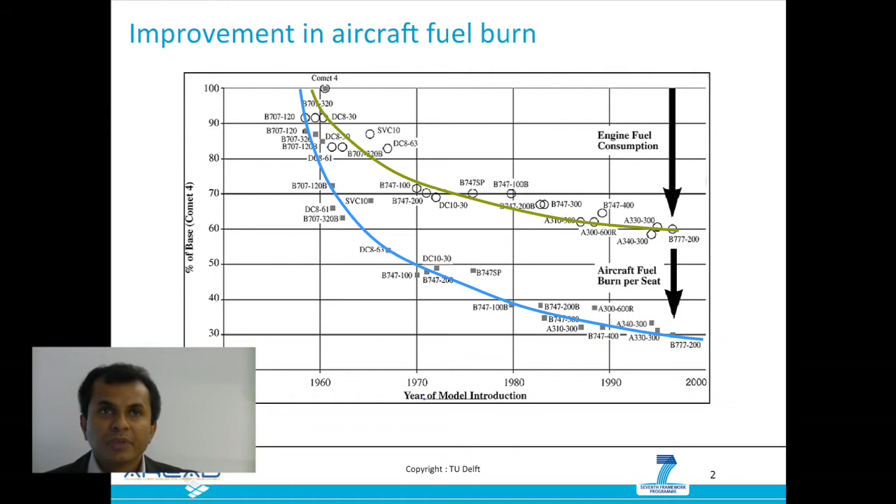Now, if you look at other things which contributed to this fuel efficiency, a significant contributor was the fact that we have managed to put more people in a given space. And that's why earlier flying was a pleasure and today it is not.

Gone are the days when air travel used to be a pleasure, at least in the economy class. That's true.

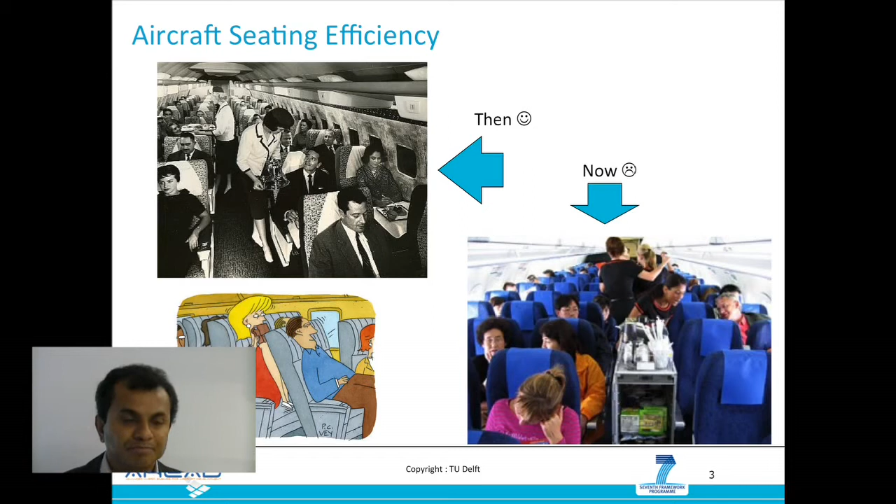There have been moments of hiccups, like after the 9/11 attacks, where the industry was a bit down, but overall growth in the aviation industry has been quite strong and steady. In the past 10 years, passenger numbers have grown by 45%. The freight traffic has increased by more than 80% on a ton-kilometer basis.

Along with these positive developments, some serious challenges for aircraft emissions, community noise, and the availability of fuel resources are encountered by aviation. These are some of the challenges that we need to overcome.

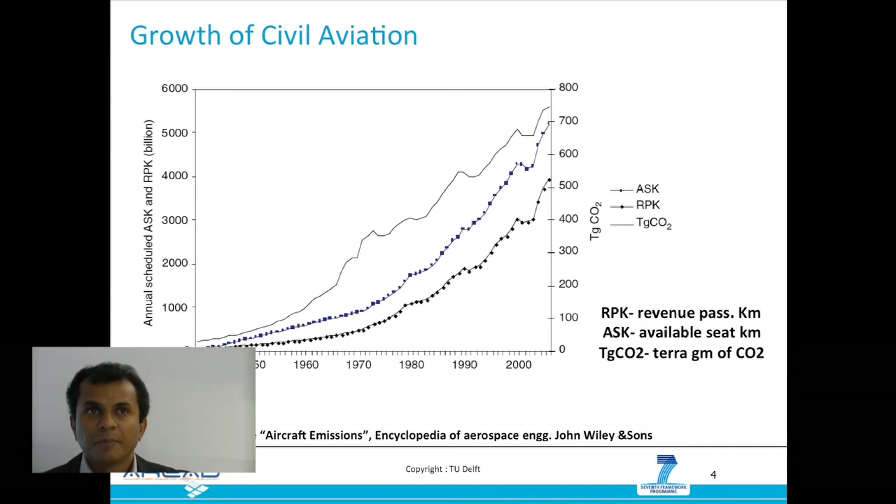Most aircraft have already expanded to their maximum passenger handling capacity. Noise restrictions near the airport are one of the main bottlenecks in increasing airport capacity today. So we have to reduce the noise of our aircraft and engines as far as possible.

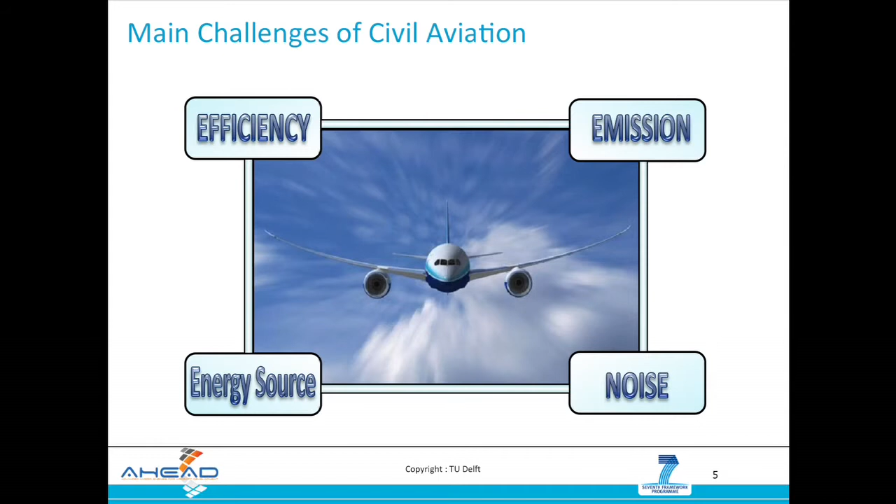Right from the beginning of aviation, aircraft have been using jet fuel as their primary energy source. However, as petroleum resources are getting scarce, we have to look for other resources. And that's why energy source is going to be a major challenge for aviation.

To take this further, many of these challenges explained earlier in the slide were summarized in the ACARE vision document called Flight Path 2050. ACARE stands for Advisory Council for Aviation Research and Innovation in Europe. It's a body which formulates the high-level vision for European aviation.

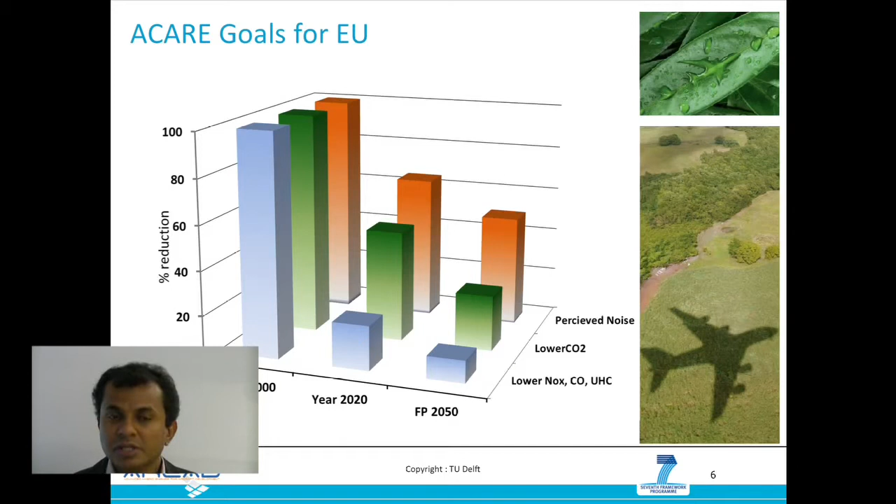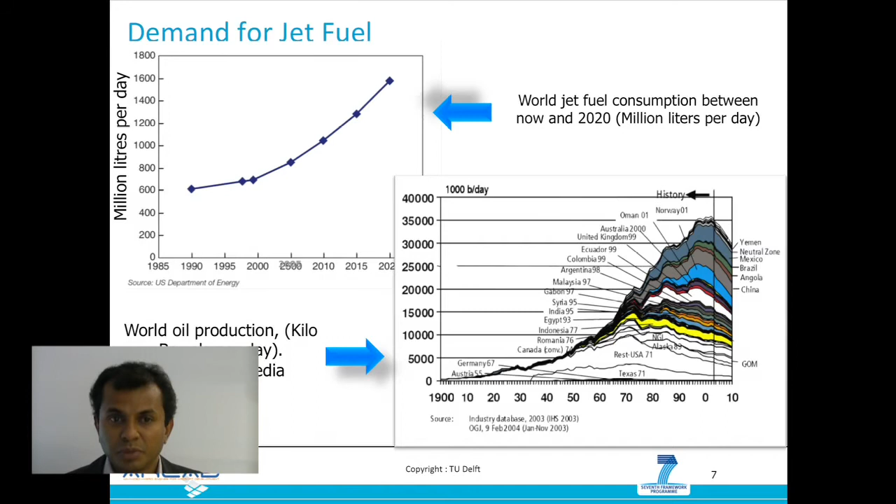So the main question is, how can we continue to fly when there would be no more petroleum available? Now, some people say that we could use biofuels. There is no way that we can produce such a huge quantity of biofuels available all over the world in a sustainable manner without affecting the food chain or the environment in a harmful way.

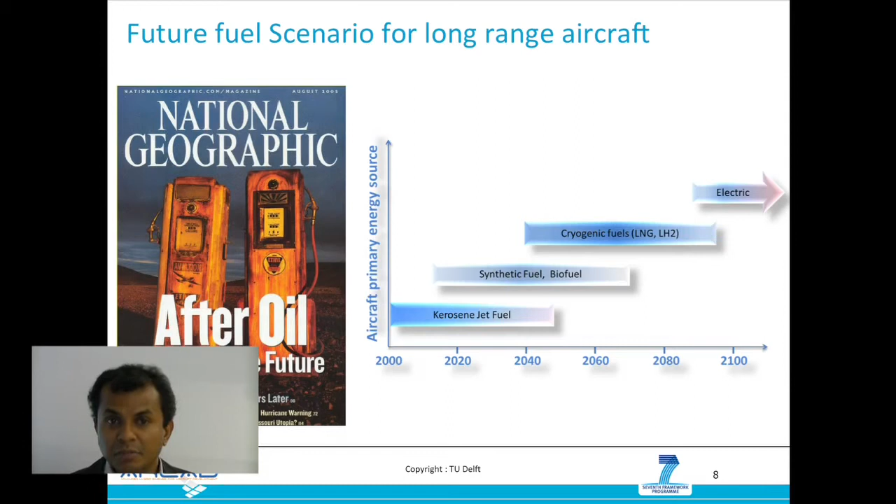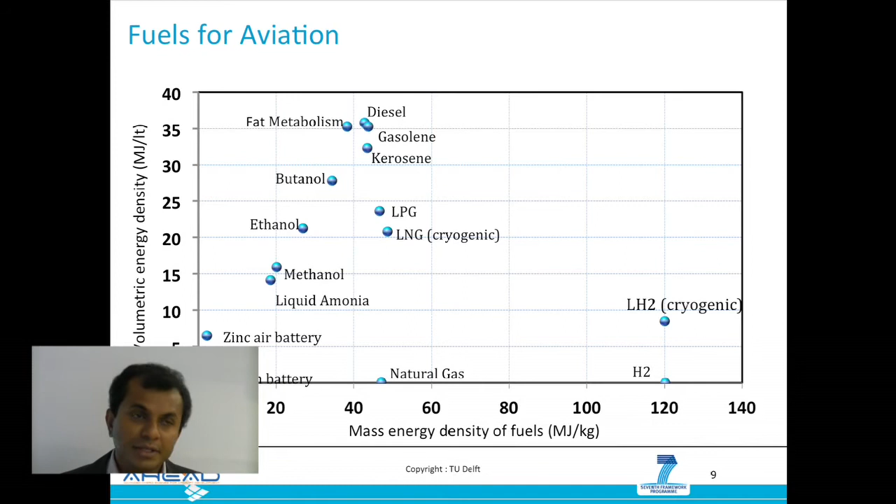Liquid hydrogen, for example, is very good in terms of energy density, but is not good in terms of volumetric energy density. LNG is somewhere in between kerosene and liquid hydrogen. LNG is also one of the cleanest fuels at the moment, and it is also widely available.

Looking separately at the CO2 emissions, again from a well-to-wheel perspective, one sees that gasoline accounts for about 30% more emissions than LNG. Overall CO2 emissions for LNG are the smallest compared to the whole range of fuel types. Also, using LNG as a fuel reduces the resulting NOx and particulate emissions, because LNG is quite a clean fuel. In addition to the fact that LNG is already one of the most environmentally friendly fuels existing, there's a lot of potential across the whole LNG chain for further reducing greenhouse gas emissions.

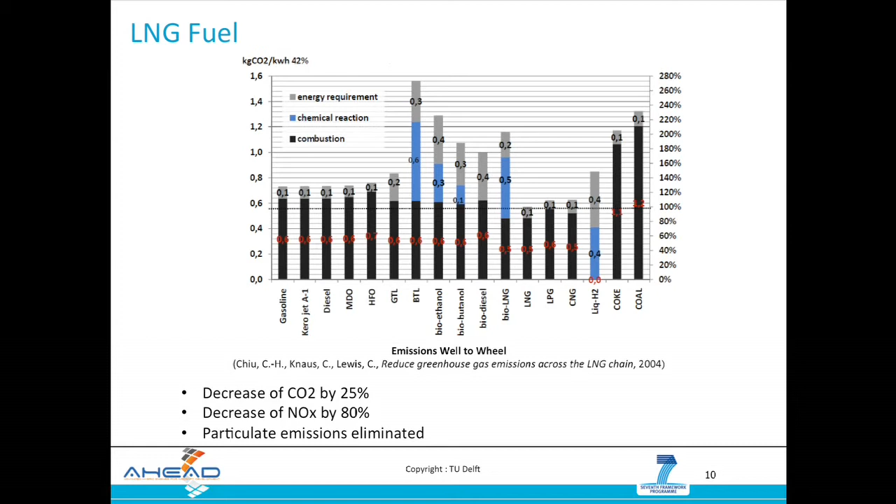However, carrying cryogenic fuel in a conventional aircraft is a problem. Normally, the fuel is stored in the wings of an aircraft. However, cryogenic fuel should be stored in well-insulated cylindrical tanks, and these tanks cannot be stored in the wings—they have to be stored within the fuselage.

As shown in this figure, you can see that the cylindrical tanks were stored within the fuselage. This is from the cryoplane project that was sponsored by the European Commission. However, storing tanks within the fuselage increases the fuselage volume substantially, increasing fuselage drag, which in turn increases the required thrust and hence the fuel consumption. You can see that conventional aircraft configuration is not suited for storing cryogenic fuels.

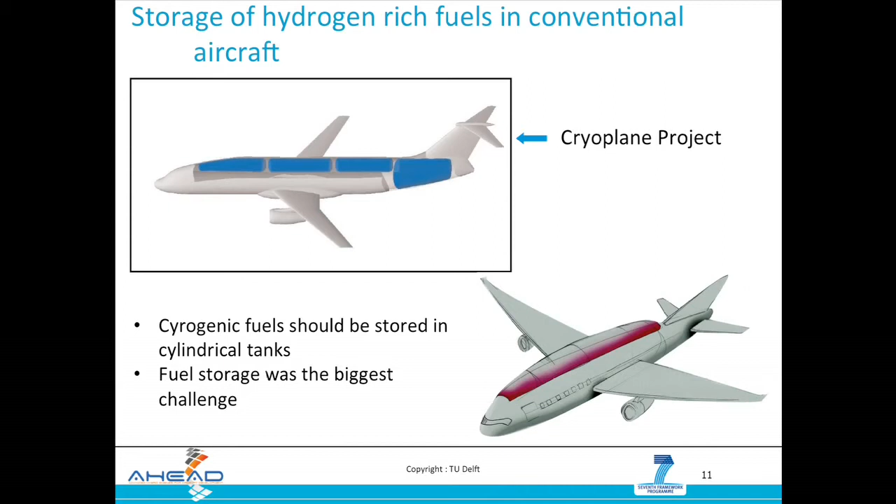Now, we came with a novel solution for storing cryogenic fuels. We are using a blended wing body aircraft. The extra volume within the blended wing body aircraft can be used to store cryogenic fuel tanks without incurring much drag penalty.

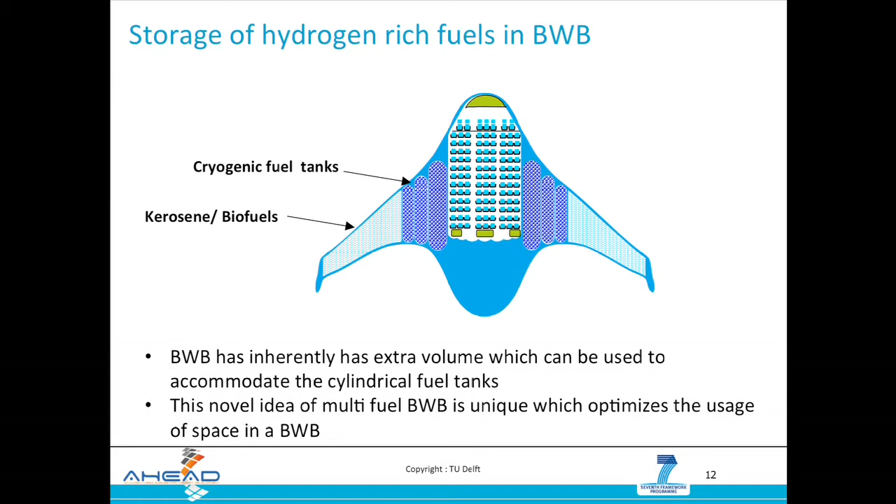We also optimized the space utilization by storing some biofuels within the wings, as can be seen here. Now, this unique multi-fuel blended wing body aircraft configuration makes carrying cryogenic fuel on board the aircraft much easier and also safer. This unique novel configuration has the potential to change aviation like anything. This could be the most significant step change in aviation after the introduction of the Boeing 747.

Based on this novel idea of a multi-fuel blended wing body, the AHEAD project and its consortium was formed, with the aim of investigating the feasibility of this novel aircraft, the multi-fuel blended wing body, and to design an engine for this unique aircraft. AHEAD stands for Advanced Hybrid Engine for Aircraft Development.

The consortium consists of Delft University of Technology, with me as the technical coordinator, WSK Rzeszów, an aero engine manufacturer from Poland, who is the main industrial partner in the project, the Technical University of Berlin, which is primarily investigating the hydrogen combustion chamber, as I'll explain later on, DLR Institute of Atmospheric Physics in Oberpfaffenhofen, looking at the effect of cryogenic fuel on atmosphere and climate change. Technion from Israel is looking into flameless combustion chamber, and Ad Cuenta is taking care of project dissemination. The project started in October 2011.

Because this uses two different kinds of fuel, it has to have two different kinds of combustion chambers. The first combustion chamber, which is located between the high pressure compressor and the high pressure turbine, is the combustion chamber that uses hydrogen. This is the typical one used in a conventional gas turbine as well.

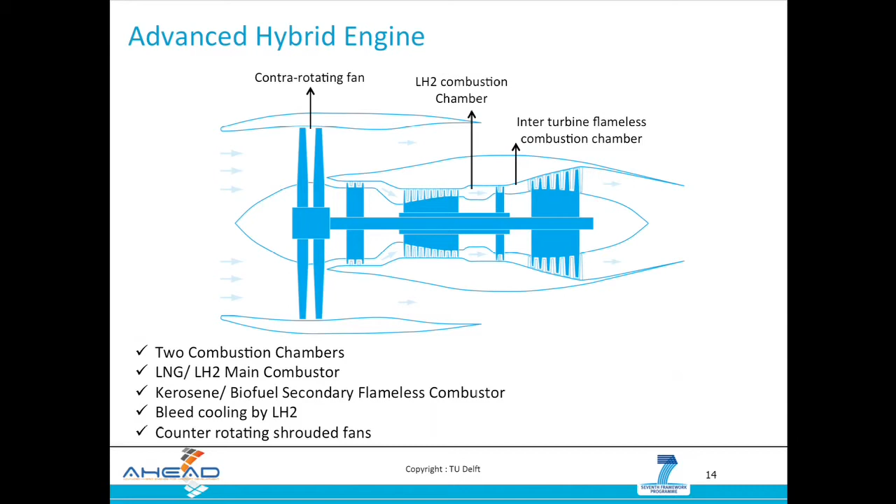The AHEAD project is divided into 3 work packages, and this chart gives you an overview of various technologies that are being investigated in the project. What we can see is, right from the beginning, the whole entire engine is being designed with environmental considerations, and the final work package is basically defined in such a way that the environmental assessment and integration can take place in a synergistic manner.

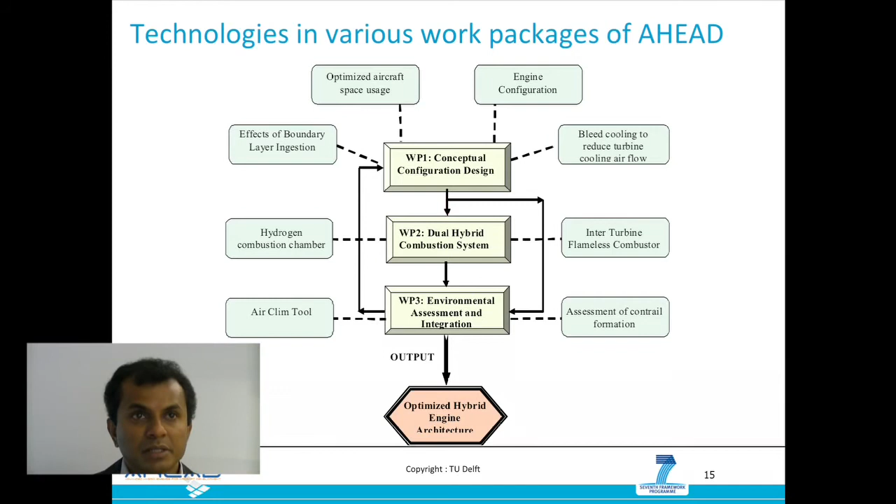It's a multi-fuel aircraft, meaning it carries two types of energy sources: one cryogenic and one liquid fuel. The cryogenic fuel could be either LNG or liquid hydrogen, and the liquid fuel could be kerosene or biofuel.

Of course, the main goal of the aircraft was to meet the cargo goals. It is designed to carry 300 passengers with a range of around 14,000 kilometers. So it's a long-range aircraft, because this is a market that we see is going to grow quite a lot—point-to-point connection, so you can fly directly from Amsterdam to Shanghai, Beijing, Tokyo, Osaka, and other places. It should be available by 2050.

Now the aircraft is designed, as I said, for two different kinds of fuels. Right from the beginning, it is being designed with the aim of reducing emissions and pollutants. Conventionally, an aircraft is designed with the objective of reducing fuel consumption, and later the impact on the environment is evaluated. This is the first aircraft in which environmental considerations are taken into account right from the beginning in the design.

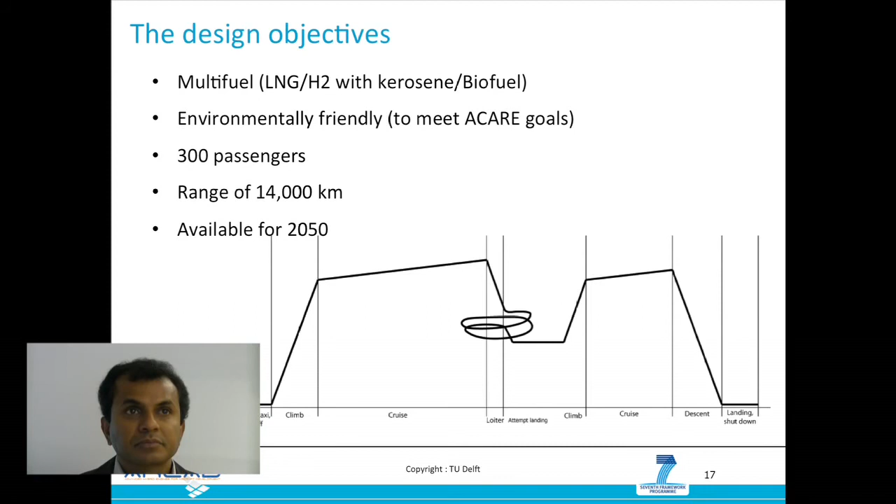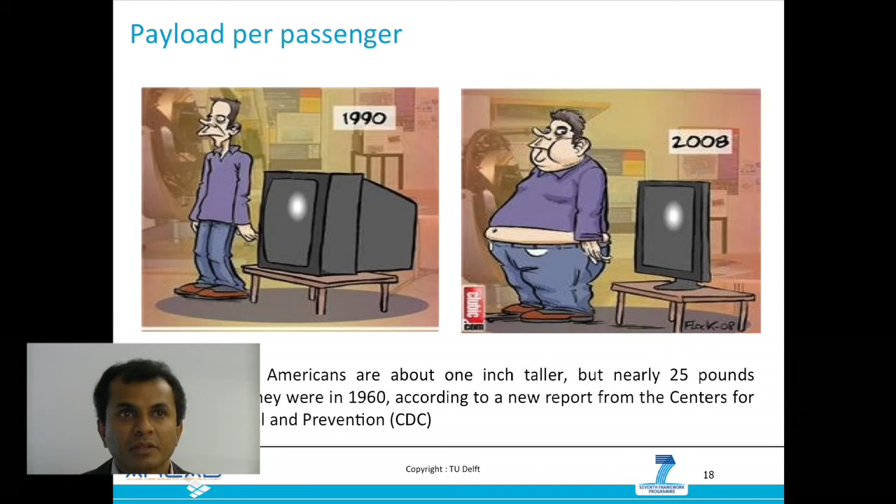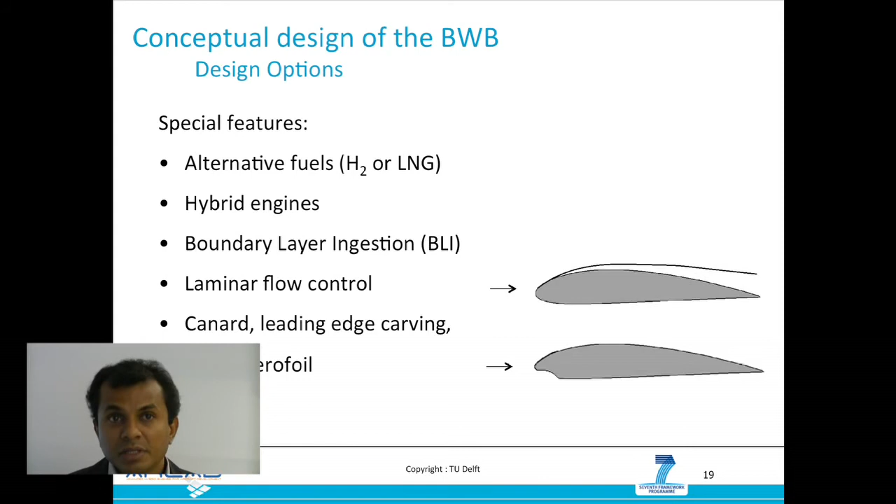The noise can be reduced significantly, and also the fuel consumption can be reduced a bit. By the year 2050, active flow control technologies will be available, which could be used to increase the laminarity of the wings. We are also using a canard for the aircraft, because blended wing bodies normally have a nose-down tendency.

We have looked into several configurations, like how we can place the passengers, and how we can segregate the space between the passengers and the space for carrying cryogenic fuels. We have looked at different fuels, as I said, LNG as well as liquid hydrogen.

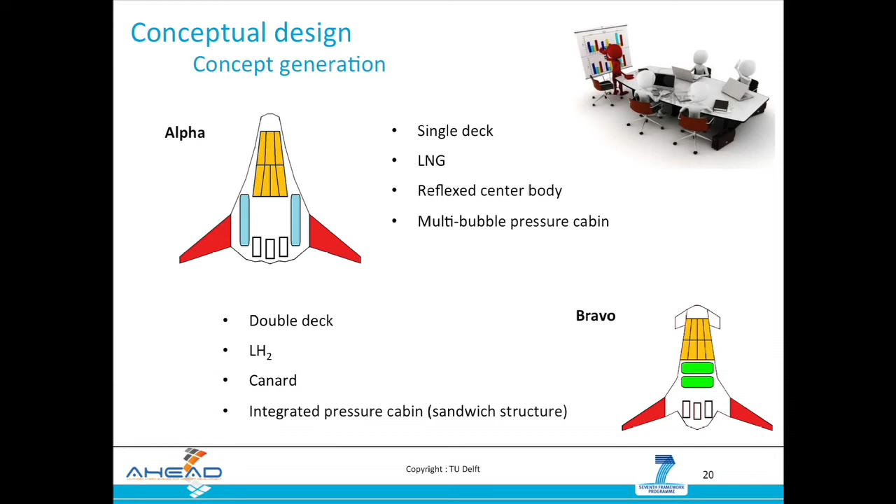This is a concept, Bravo, which had a different configuration of aircraft. One of the main considerations looked at was the evacuation rule of 90 seconds. A lot of trade-off was done.

This is one more configuration that we looked into. Again, every configuration has slightly different features, slightly different configuration in terms of how we separate the passenger section, how we store fuels, and what kind of fuels we use.

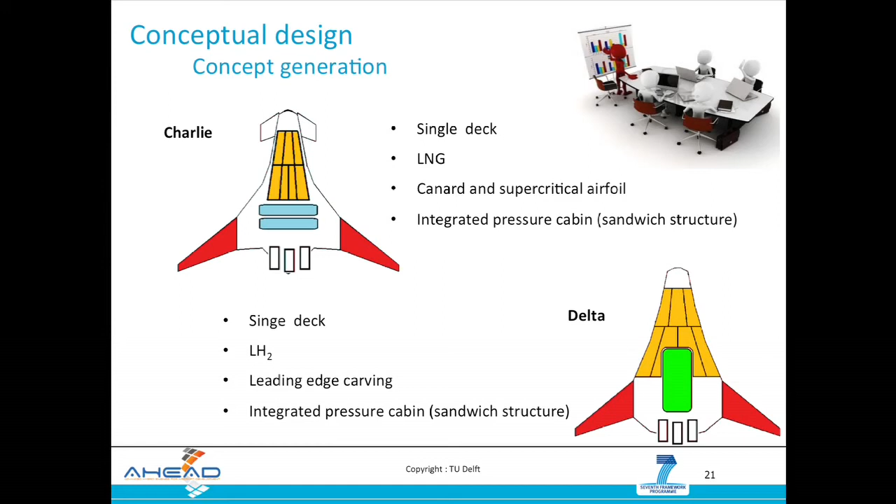Of course, what we chose was Charlie, the third concept you see on the slide. Preliminary design procedures were used: we went from conceptual platform to planform sizing and arrangement, then estimated weight and CG. After that, we looked at stability and control, aerodynamics, structures, and performance analysis, and this loop was carried on over and over till we could converge to a reasonable design.

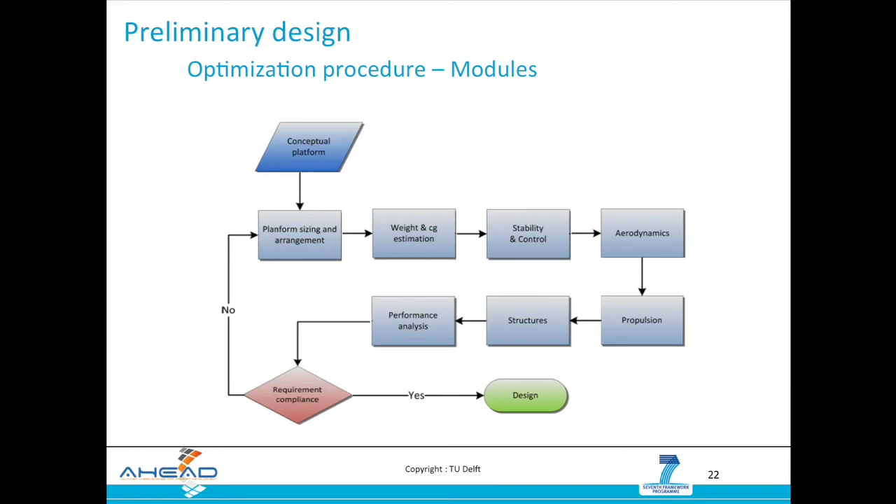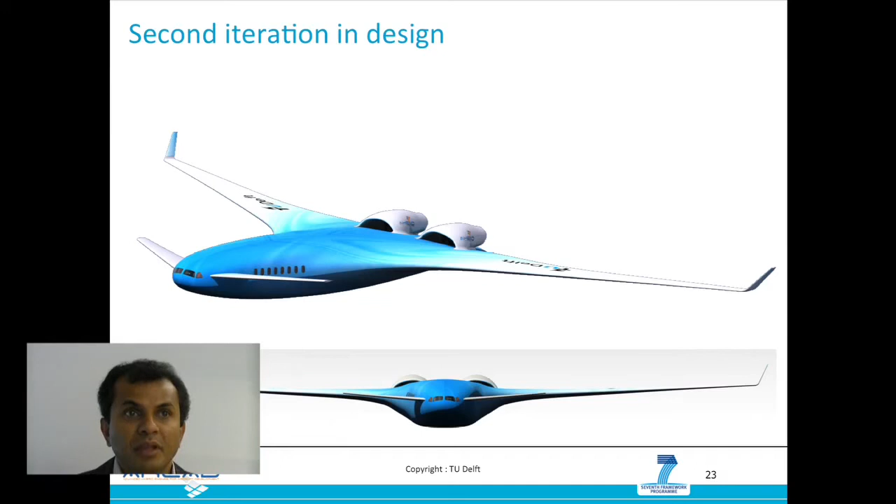Designing a low NOx hydrogen combustion chamber is a huge challenge for designers. Within the AHEAD project, the Technical University of Berlin managed to design a burner which can be used as a basis for designing a hydrogen combustion chamber.

This burner uses a combination of swirl and axial injection to allow for pre-mixing of the fuel without facing the danger of flashback. What do I mean by flashback? It's a phenomenon that happens when the hydrogen flame starts creeping up towards the fuel injector, because hydrogen is so reactive. This can be catastrophic, and it can burn down the whole combustion system within a few seconds.

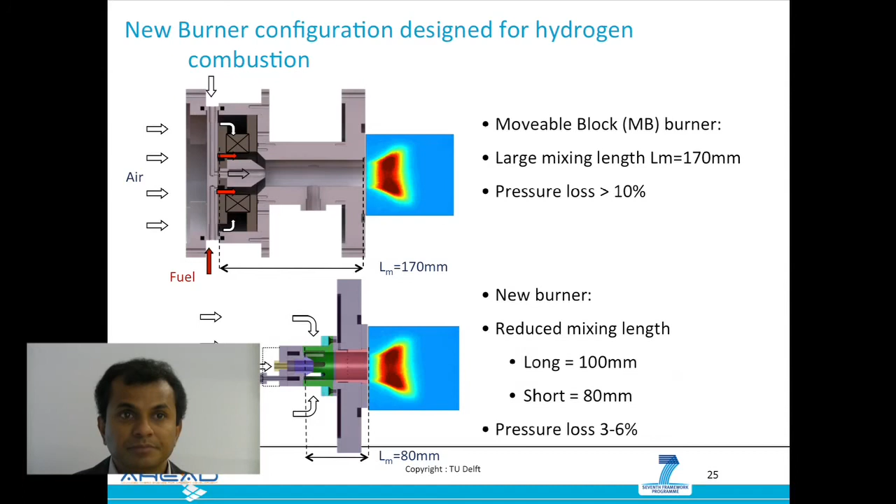The pressure losses within this new combustor design are also within acceptable limits. This new burner was tested in the combustion test rig of Technical University of Berlin. Diagnostic instruments were used to characterize the burner and the combustion zone. The new burner design was tested at atmospheric pressure. This is the schematic of the burner.

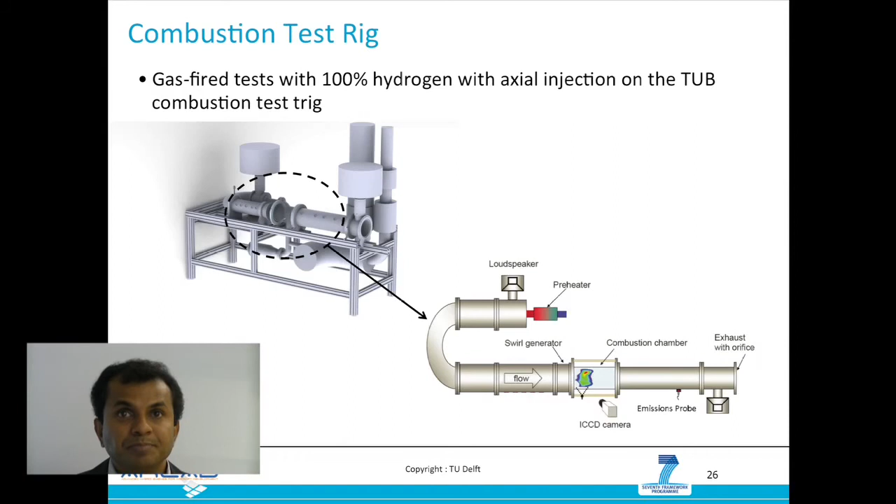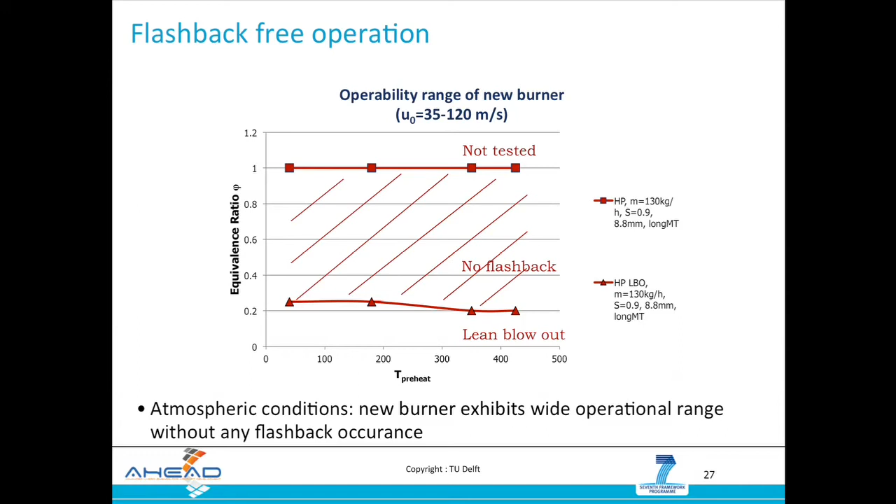The burner was tested at various inlet temperatures and equivalence ratios, that is, various air to fuel ratios. Within this range of equivalence ratio that is likely to be encountered in engine operation, the burner exhibited very stable operation without any flashback over a long period of time. So that has been one of the major achievements of the AHEAD project.

As I've explained earlier, we use two different kinds of fuels, and that's why we require two different kinds of combustion chambers. The second combustion chamber, which uses biofuel, is actually situated between the high pressure turbine and the low pressure turbine, and it uses a very unique combustion technology that we call flameless combustion.

What is flameless combustion? It's a kind of combustion that takes place at high temperatures and low oxygen concentrations. The unique feature of this technology is that the NOx emissions from this combustion are very, very low. We want to use this technology in the second combustion chamber so that the NOx emissions from the AHEAD engine are very low.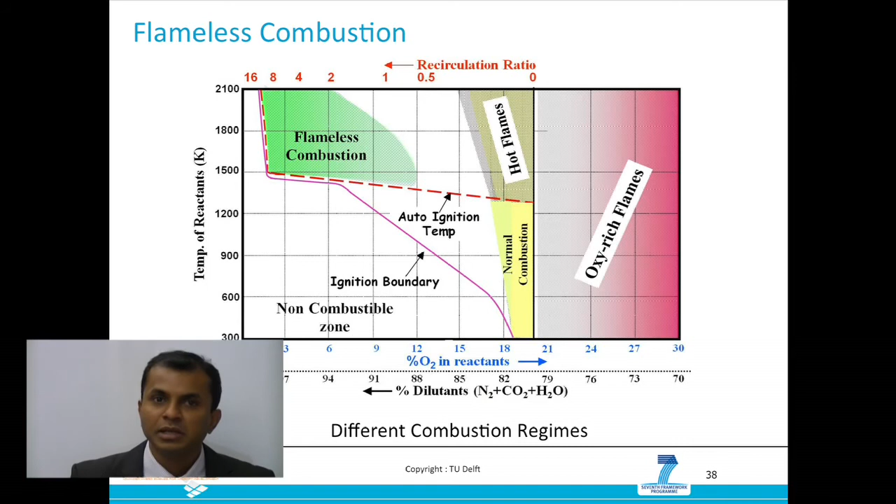The combustion chamber is a very unique design. The prototype will be tested at atmospheric conditions in IST Portugal. The Technion from Israel is spearheading our efforts in designing this flameless combustion chamber, and we are trying various configurations. We are eagerly waiting for the results from this test, because this will be really a revolution in terms of combustion chamber design as far as gas turbines are concerned.

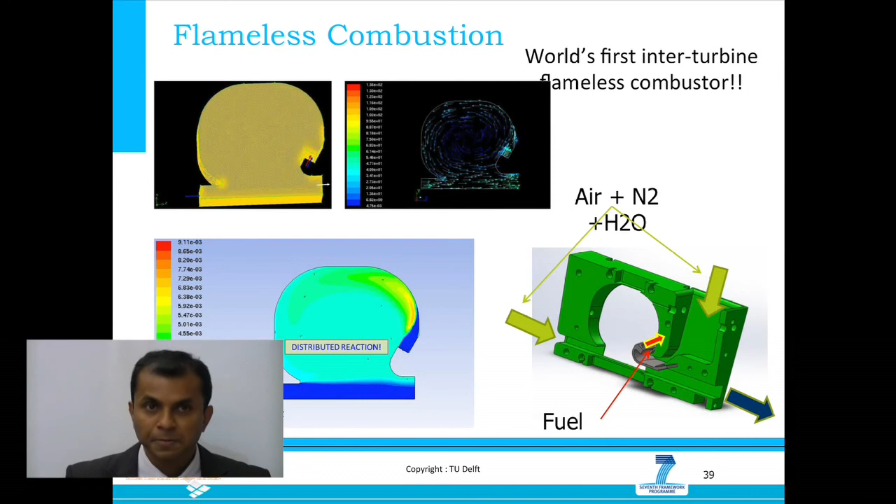Our partner WSK, the industrial partner, is involved in designing a cryogenic heat exchanger for cooling the bleed air. Why do we cool the bleed air? Because this technique of cooling the bleed air enhances the efficiency of the engine.

It also has another advantage: the fuel going into the combustion chamber becomes heated, and when it gets heated, the amount of fuel required in the combustion chamber also reduces. So we have two advantages of using a heat exchanger to cool the bleed air, using the onboard fuel in a synergistic manner to increase efficiency.

We have performed the sizing of various components in this heat exchanger, and the design has some unique features, which is why it's under patent at the moment.

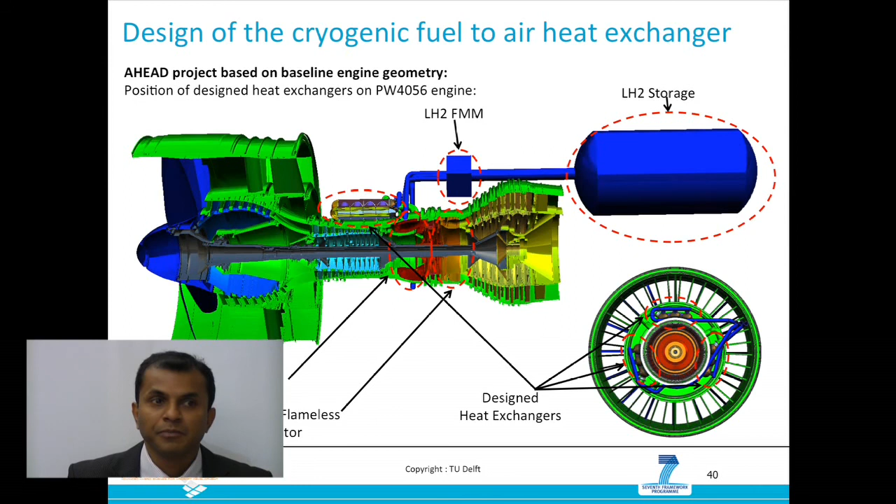In terms of engine performance, when compared to the baseline engine, the GE90, which is used in the Boeing 777 aircraft, and that is the baseline aircraft for our whole design, we see that the hybrid engines can reduce the energy consumption and CO2 emission per unit thrust produced while increasing the specific thrust.

However, this reduction is only from the engines. When we combine this reduction with the aircraft as well, because we also use a blended wing body aircraft, which is aerodynamically much more efficient, then the results can be seen in the next slide.

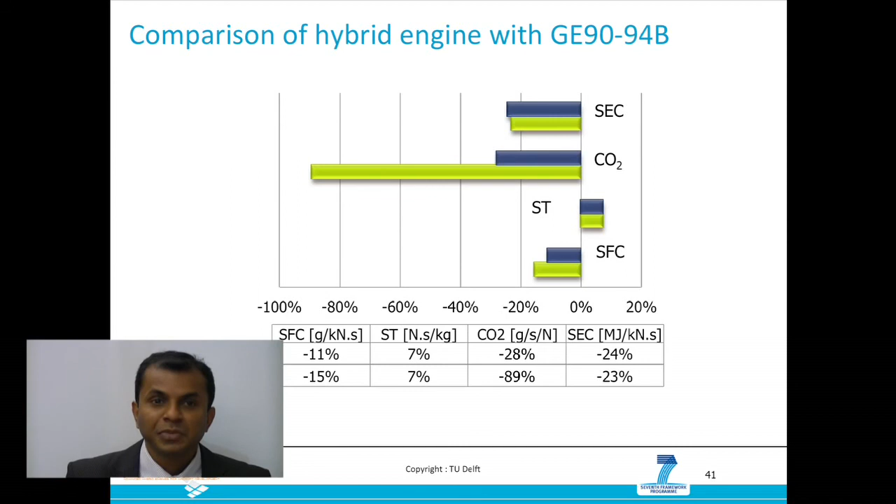And what do we get? When we compare our aircraft with the baseline aircraft, that is the Boeing 777-200ER, we see that the CO2 emission is reduced by around 65% when we use LNG and biofuel as our energy sources. This reduction is based on a per unit payload, per unit kilometer basis.

The reduction in CO2 can be increased further by using liquid hydrogen and biofuels. However, since the life cycle carbon footprint of hydrogen is not well known at this moment, the exact numbers cannot be predicted. The particulate emission is also significantly reduced due to the cryogenic fuel and flameless combustion especially. And since the blended wing body has more volume per passenger, we believe that it would give a more comfortable travel for people.

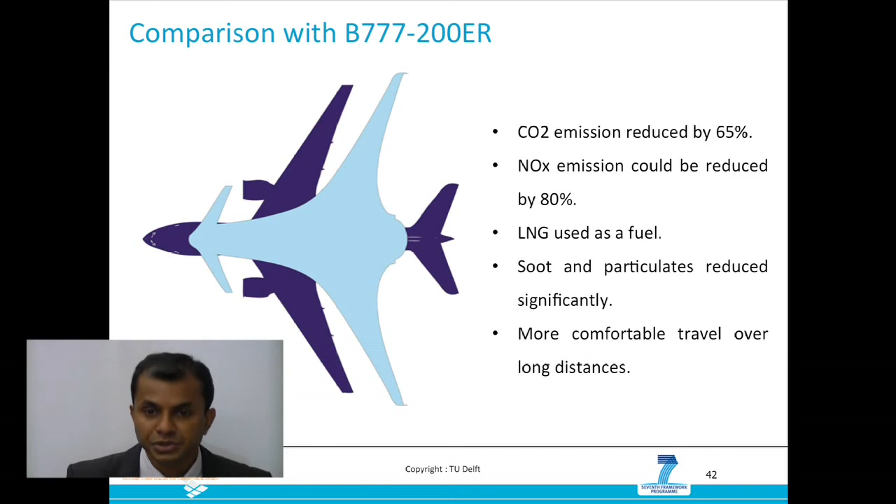Now, the multi-fuel blended wing body with hybrid engines reduces the emission of CO2 significantly. However, there is a penalty, and that is the increase in water vapor content because we use cryogenic fuels. Even though water vapor is less harmful in terms of global warming at lower altitudes, at flight altitudes the effect can be significant.

Now, what we are doing with DLR is looking into the effect of this increased water vapor content on global warming.

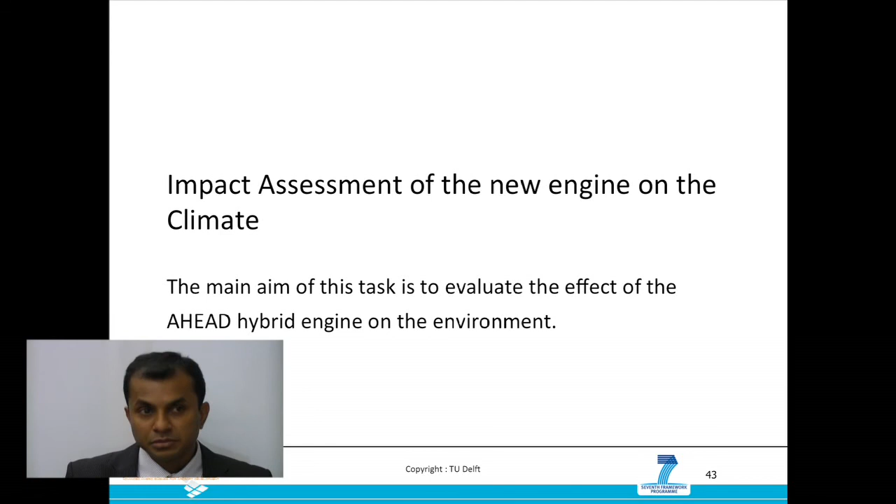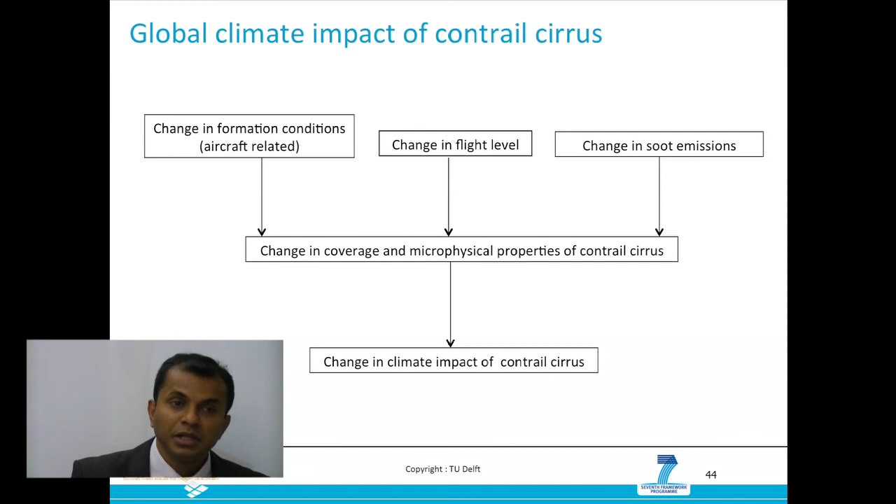This is a very complex phenomenon, and there is a serious lack of understanding of how this occurs in general. Our partner from DLR, the Institute of Atmospheric Physics in Oberpfaffenhofen, is tackling this problem. They are looking into the effect of increased water vapor content, the reduction in soot emission, etc., on contrail formation, and how this contrail formation affects the greenhouse gases, or the greenhouse effect in general.

Preliminary studies show that if we fly higher, the increased water vapor content will increase the greenhouse effect. However, we are working on optimizing the flight mission with respect to greenhouse emissions. At the moment we don't know the optimized mission, but in due course of time we will come to know that.

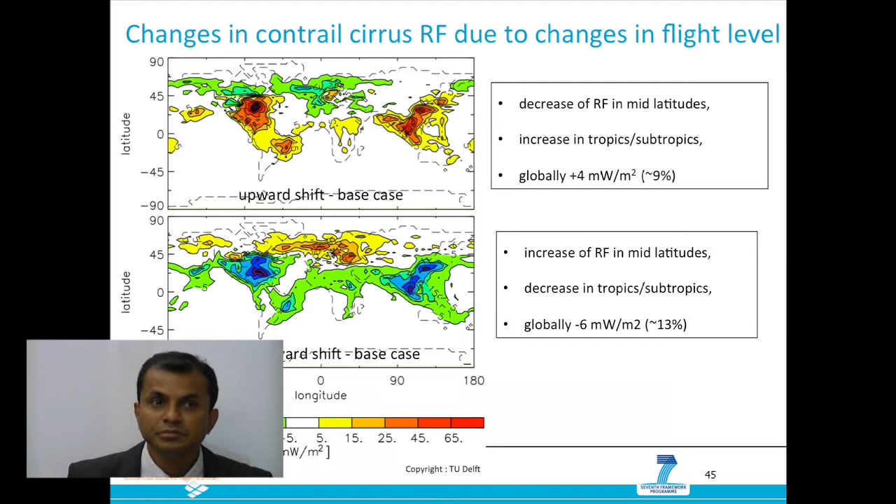I showed in the earlier slide what the main challenges of civil aviation are. And I'm proud to say that the AHEAD project tackles most of these challenges.

Just to summarize the main achievements of AHEAD: we gave a new configuration to the aircraft, the multi-fuel blended wing body aircraft, which has major advantages as compared to the conventional tube and wing aircraft, especially for long range. The novel way in which we are trying to store cryogenic fuel tanks in the aircraft can overcome some of the inherent disadvantages of the blended wing body.

Thus we increase the feasibility of the blended wing body aircraft. We give more credible options for future energy sources, not only looking at long-term options like liquid hydrogen, but also short-term options like LNG, which is very cheap and quite efficient.

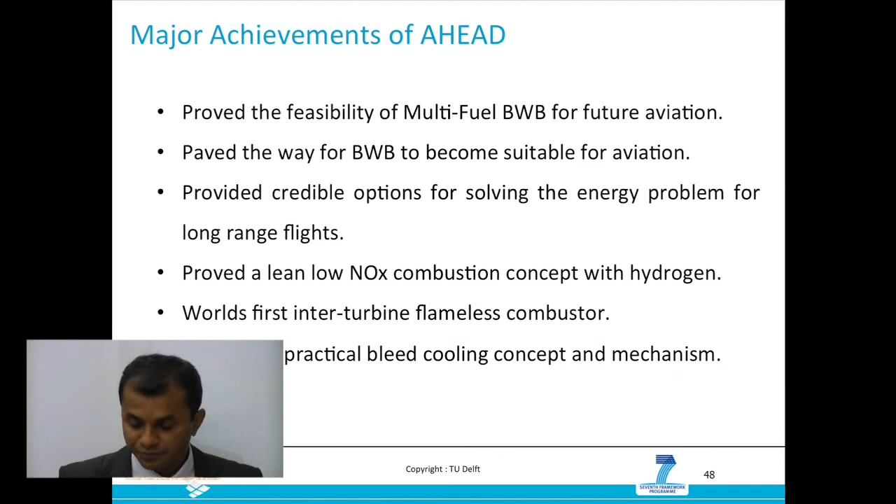We have designed a new low-NOx combustion system for hydrogen as well, and this combustion system is not prone to flashbacks, which is very important. We are designing the first interturbine flameless combustion chamber, and if proved successful, this will really be a step change in terms of combustion technology applied to aero engines. And of course, we are also working on the bleed cooling concept.

In the end, I would like to pay tribute to Dr. Zbigniew Grabowski. He was a member of the AHEAD advisory board. Unfortunately, he passed away in January 2013. We will always be indebted to his guidance and support during this project.